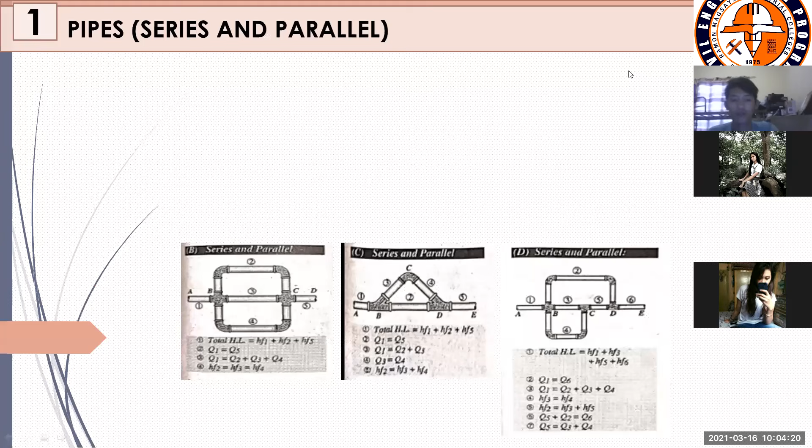So series pipes: when pipes of different diameters are connected end to end to form a pipeline, they are said to be in series. The total loss of energy will be the sum of the losses in each pipe or connection. So kung nakikita ninyo dito sa figure A natin, that would be the perfect example for series pipes. Alam naman natin that our pipes are not long enough na isang pipe lang talaga gamitin natin sa isang system. So ginagamit natin itong series pipe para mas mapataas, para mas mabaliko natin yung mga pipes natin.

So when two different diameters are connected to each other, nagkakaroon tayo ng isang pipeline. Like for example, itong point 1, iba yung magiging diameter niya from point 2. Iba rin yung magiging diameter niya from point 3, but they are connected to each other to form a pipeline. Mamaya na natin pag-usapan itong mga formulas na binigyan nila every figure.

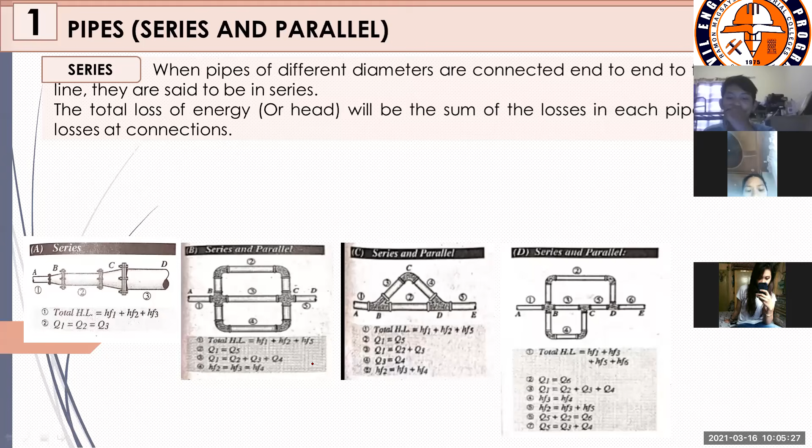So you have here parallel. Pipes are said to be parallel when they are so connected that the flow from a pipe branches, divided into two or more separate pipes, and reunites into a single pipe. Ang tinatawag natin na parallel pipes is yung mga pipes na same notation, same placement, same arrangement. As you can see dito sa figure B, pipe 2, pipe 3, and pipe 4 are on the same notation, same placement, parehas sila ng length, parehas sila naka-horizontal.

Whereas dito sa figure C, it is a series parallel pipe. Series kasi yung different pipes are connected to each other. Bakit siya nagiging parallel? Yung pipeline 3 and pipeline 4 are the same notation, same placement ng pagkakalagay. Yun yung tinatawag natin na parallel.

So for figure D, it is series pa rin kasi connected pa rin yung mga pipes, and it is considered as parallel because your pipeline 2 is parallel to your pipe 3 and 5. It is a straight line. Ano pa yung parallel pipes sa figure D? It is your pipeline 3 and pipeline 4 because they are on the same placement, the same arrangement. I hope naintindihan yon.

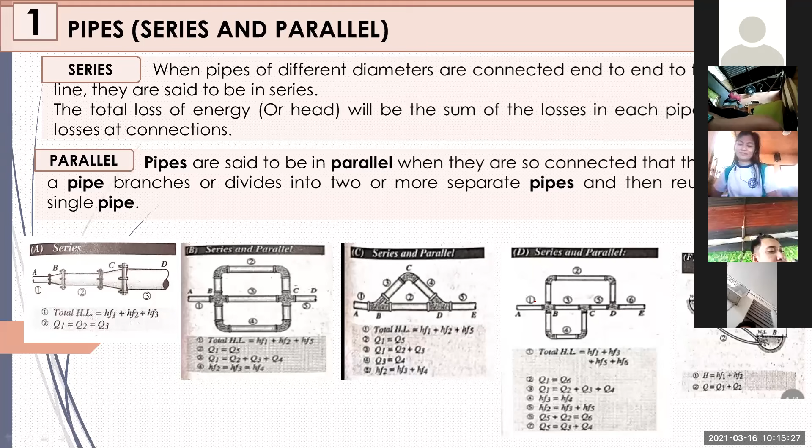1, 4, 5, 6. That is correct. Okay? That is correct. Thank you, Tuante. Kasi ang flow of water natin is pwedeng dumaan sa pipeline 1, pipeline 4, aakyat siya papunta sa pipeline 5, then lalabas siya sa pipeline number 6.

Another one, Magna. May nakikita pa ba tayo? Yes, ma'am. Sige, go. Sa head loss, 1, 2, 6. Yes, that is correct also.

Thank you, Magna. So the flow of water can also flow through pipeline 1, pipeline 2, and pipeline 6. Ibig sabihin, sa pagkuha natin ng total head loss, we can consider 3 equations. Yung nakasulat dito, yung sinabi ni Tuante at yung sinabi ni Magna. I hope nasusundan yan.

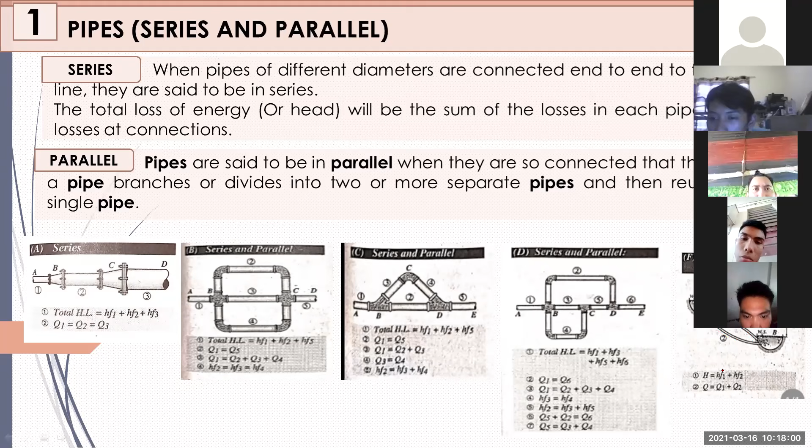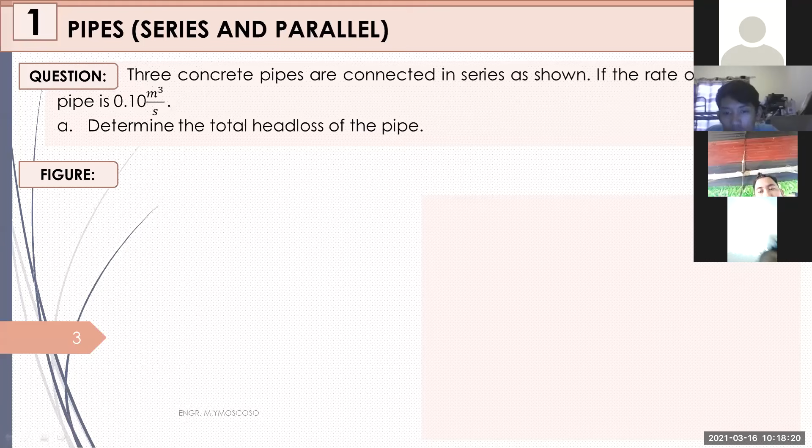May tanong? Wala? Okay. So let us continue. Let us have some example. So there are 3 concrete pipes that are connected in series as shown. If the rate of flow in the pipes is 0.10 cubic meters per second, let us determine the total head loss of the pipe.

So you have here a series pipe only. Wala kang nakikitang parallel pipe. So you have your pipe 1, pipe 2, pipe 3 with different lengths and different diameters. Meron tayong factor na binigay which is F, your friction factor. Among those formulas sa head losses, ano yung may friction factor? Hindi pa rin memorize? Tatlong formula ng head losses natin.

Midterm na. You have your Darcy-Weisbach, your Manning's, your Hazen-Williams. Alin sa tatlo? Yes, that would be the Darcy-Weisbach. Kapag N, Manning's. Kapag C, Hazen-Williams. Dapat ngayon alam nyo na yan. Gamit na gamit yan sa board exam. I hope ngayon pa lang memorize nyo na yung formula natin.

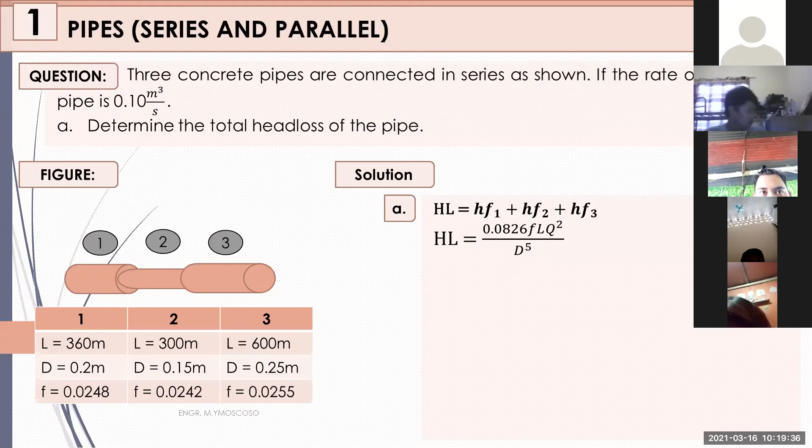So ano yung equation for the total head loss? Head loss 1 plus head loss 2 plus head loss 3. The formula is 0.0826 F L Q squared over D raised to 5. Kindly prepare your calculators. Kindly solve and confirm if tama yung head loss 1, head loss 2, and head loss 3. Sige, paki-compute.

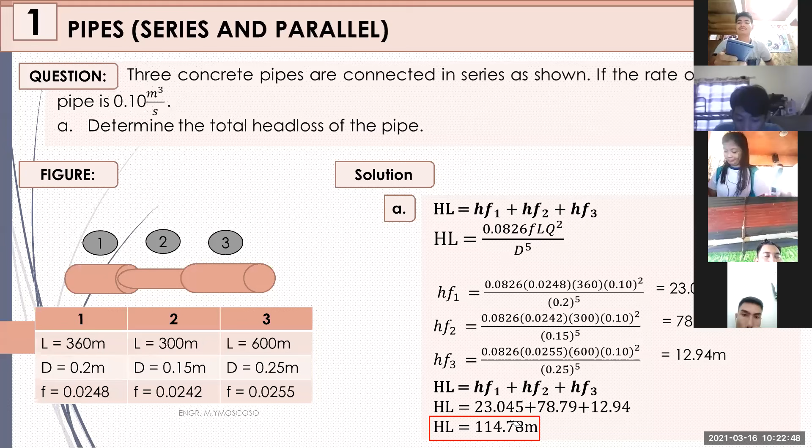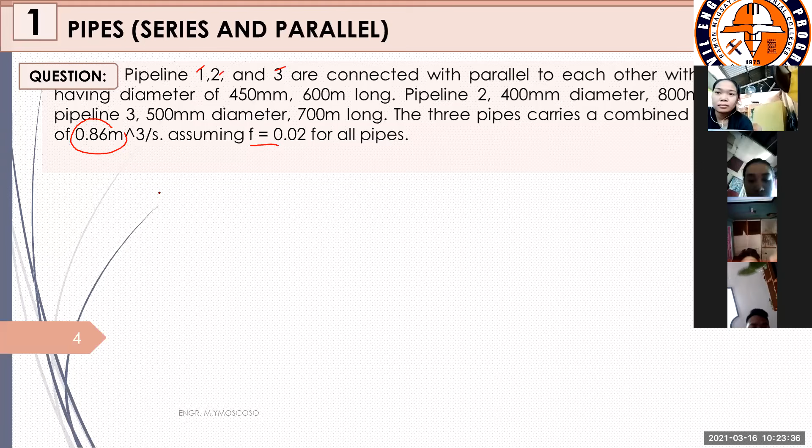Yan. So this is considered as your pipe 1. This is considered as your pipe 2. At this is considered as your pipe 3. Kasi sabi nga, itong tatlong pipe na ito is parallel to each other. Tama? Tapos sabi nga dito sa problem na ito that there is a discharge sa tatlong ito. So ibig sabihin, yung tubig na pumapasok dito or the rate of flow is 0.86. Okay? And yung lumalabas also dito sa pipe na ito is 0.86 cubic meters per second.

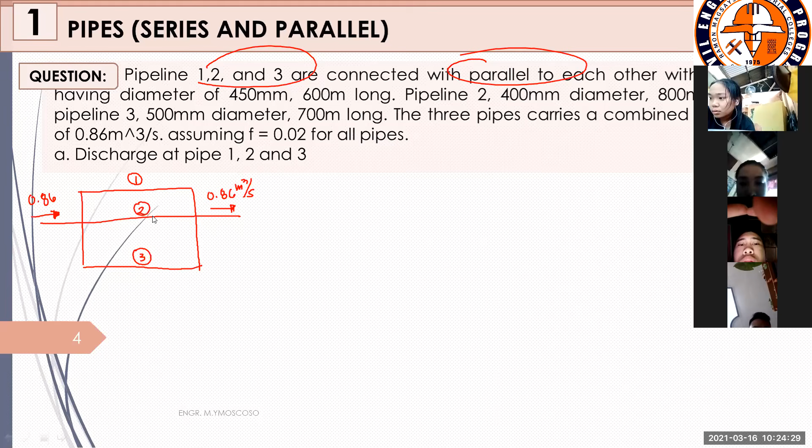So ano yung tanong pala? So let us determine the discharge at pipe 1, pipe 2, at pipe 3. Okay? So ano yung una natin gagawin? Gagawa tayo ng equations natin para ma-solve natin ito. So according sa principle na pinag-usapan natin kanina, your head loss 1 is equal to head loss 2 and it is equal to head loss 3, since they are parallel to each other. So how about the discharges? You have Q equals Q1 plus Q2 plus Q3. That makes sense kasi yung 0.86 natin, i-distribute niya yung flow niya sa pipe 1, 2, and 3. So this will be our main equation. Hahanapin natin yung discharges natin through this equation.

Okay? So, ano yung gagawin natin? Saan ba natin nakikita yung discharges natin? Di ba usually, ang formula for our discharge would be Q equals area times velocity. Ang area, wala tayong problema kasi there is a diameter given. Saan tayo magkakaproblema? That would be sa velocity. So, saan pa natin nakikita yung discharge natin? Di ba nakikita natin siya sa ating head losses? So, pwede natin i-equate yung ating mga equation para makuha natin yung discharge.

So, solve muna natin. Try natin yung HF1 equals HF2. Ibig sabihin, meron tayong Q1 dito, meron tayong Q2. So, paano kaya kung gagawa tayo ng equation ng Q2 in terms of Q1? Para yung value ng Q2 natin, ipapasok natin dito. The same sa Q3, in terms of Q1, tapos ipasok natin dito sa equation na ito, para makuha natin yung value ng Q1 natin. So, para mas maintindihan, gawin na lang natin.

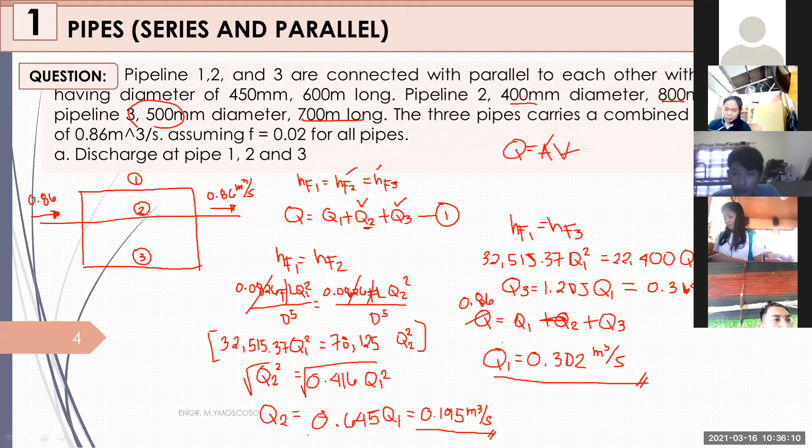Tama? Tama ba? Yes. Q2? Yes, ma'am. 0.195. Okay, thank you. So let us solve for your value of your Q3. So you have 1.205 times Q1. Value ng Q1, that would be 0.302. Can we solve for the value? 0.364. 0.364 daw. That would be in cubic meters per second. So kindly confirm if tama yung value ng Q3 natin. Yes, ma'am. Correct, ma'am. Okay. Thank you.

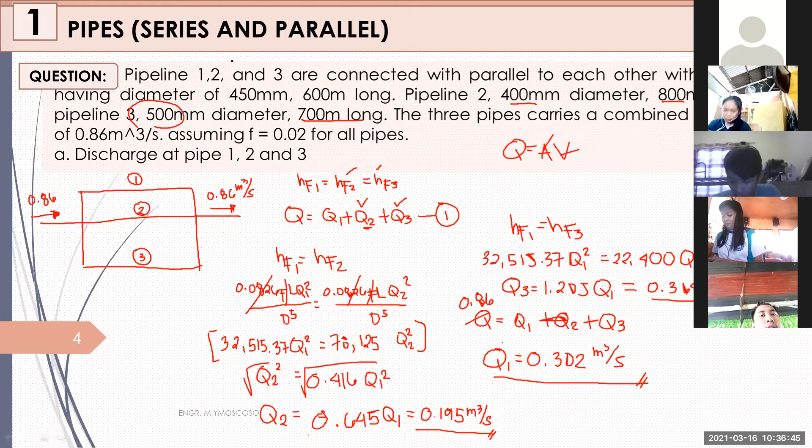So therefore we conclude that the 3 discharges sa pipes natin, that would be 0.302, 0.195, and 0.364. So gets ba kung ano nangyari sa ating pipe system? Okay tayo? No further question? Okay pa? Sige. Thank you. So let us move on to another set of example about your series and parallel pipe. So I hope na susundan niyo yung nangyayari sa atin. Okay.

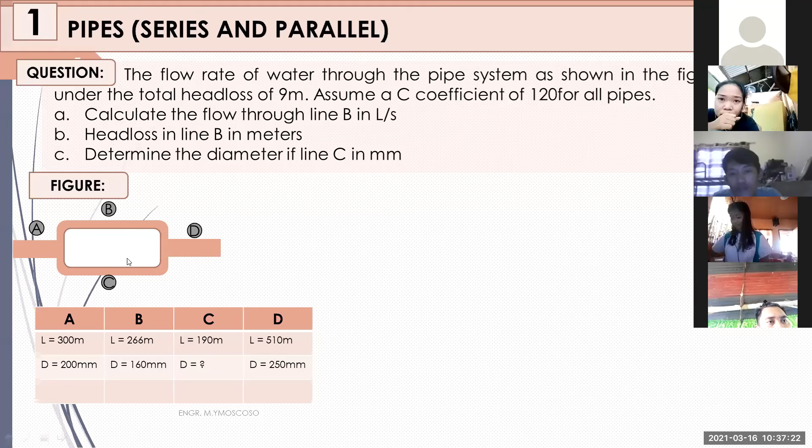So you have here the flow rate of water through the pipe system as shown in the figure is 50 liters per second. So you have here a total head loss, no? Nagbigay na siya ng total head loss ng pipes natin, which is 9 meters. So assume a C coefficient of 120 for all pipes. Hanapin natin yung discharge at B, head loss at B, at diameter at C. Kasi hindi binigay yung ating diameter sa pipeline C natin. But your pipe B and pipe C is parallel to each other. Okay, so sabi nga dito, meron daw tayong